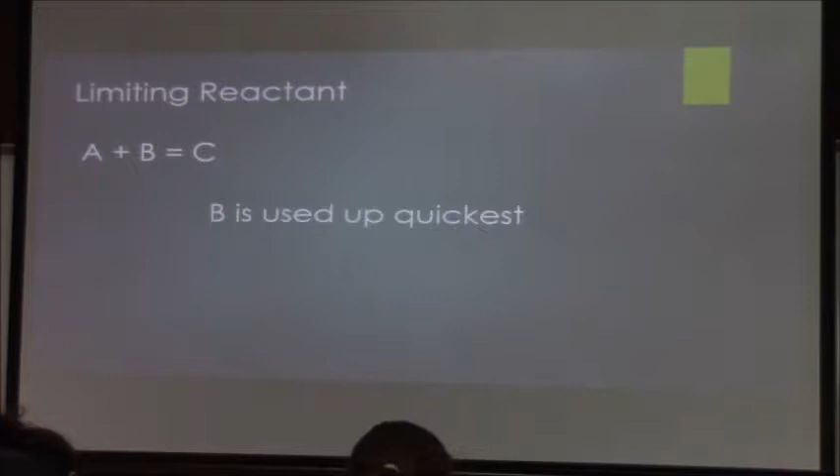So this is Glenn Beckmeyer's quick water chemistry background crash course. Limiting reactant: we have the equation A plus B equals C, and B is used up quickest, so B is the limiting reactant. If we had more B, the reaction could still go on. Simple, right? You guys follow me? I want this to be interactive — I don't want this to just be boring.

I hated those kinds of presentations. So, limiting reactant in an aquatic system — CNP. Can someone tell me what CNP stands for? The C stands for carbon, the N stands for nitrogen, and the P stands for phosphorus. The growth of biomass in an aquatic system is directly proportionate to CNP. So the more CNP introduced, what do you think happens to the biomass? More biomass, there you go.

The higher levels of CNP that are introduced into an aquatic system cause an overabundance of biomass. What do we call that? Eutrophication — there we go, it was.

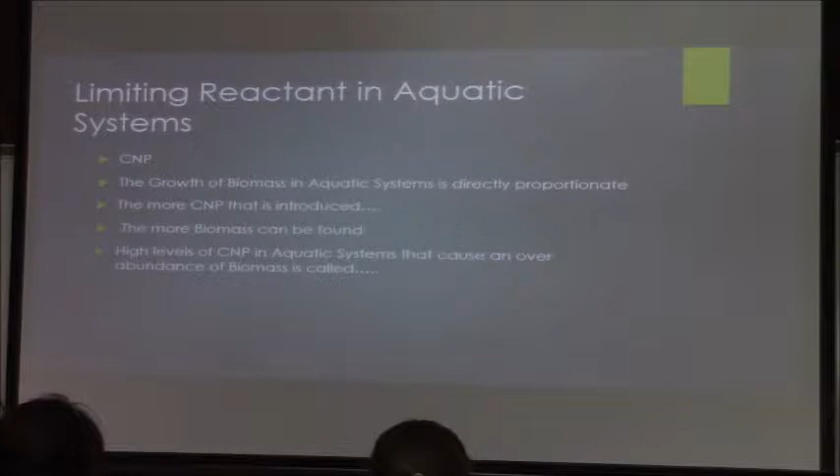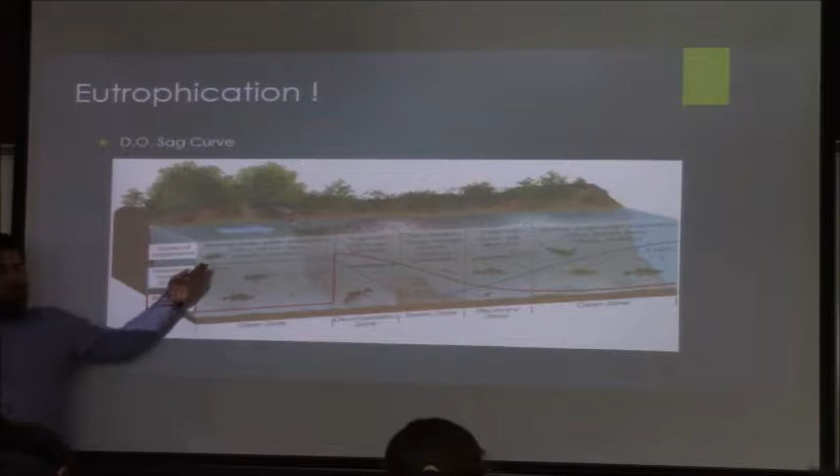So this is a DO sag curve with illustrations of aquatic organisms on the back. I just really like fish. Here you can see in the clean zone, in the healthy stream, you have high dissolved oxygen, so you have many different levels of organisms and low BOD.

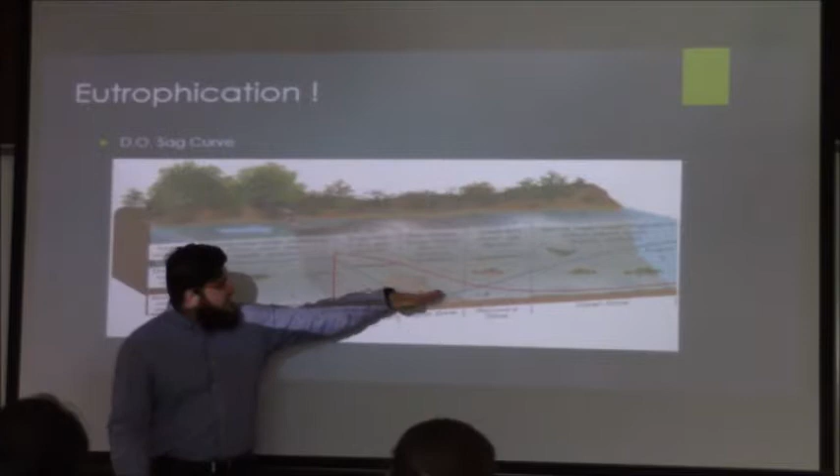When water pollution, like CNP, is introduced, that causes eutrophication, the BOD raises, and because the BOD raises, we have this sag in the oxygen. If you look at the illustrations, when this sag in oxygen occurs, we have these lower levels of organisms that aren't too favorable to humans.

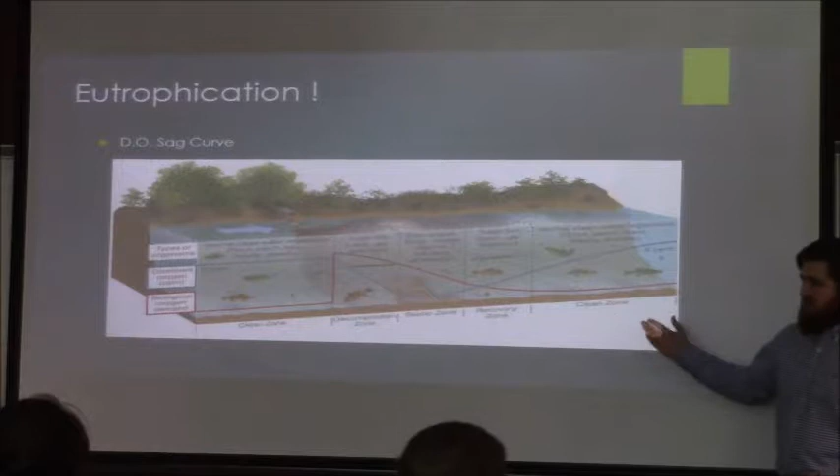I'm a big fisher, I'm a fisherman. I like fishing, I don't like this, I want this, or I want this. That's why personally I like this illustration a lot. Eventually the stream will heal, the BOD will lower, and the dissolved oxygen will raise, and then we have the more favorable kind of fish that you want to go after.

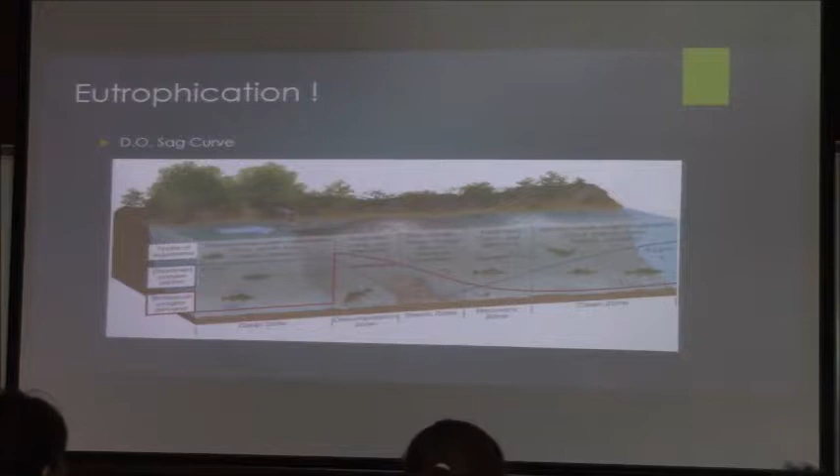Who can tell me what the first form of nitrogen is that is introduced? Okay, we got ammonium. Can someone tell me the next one? Nitrite. Nitrite, all right, what's next? Nitrate. Nitrate. And then ultimately what do we want? N2. N2. What's special about N2? It's a gas, it will bubble out, it will leave the system. We want that to leave.

Originally in wastewater treatment, the ammonium and nitrite at high levels, we wanted to get rid of those because they're toxic. I also have a saltwater fish tank at home. If you have high levels of ammonium and nitrite, you're going to kill all your fish. You want those toxic levels to go down before cycling the tank, before you introduce your fish.

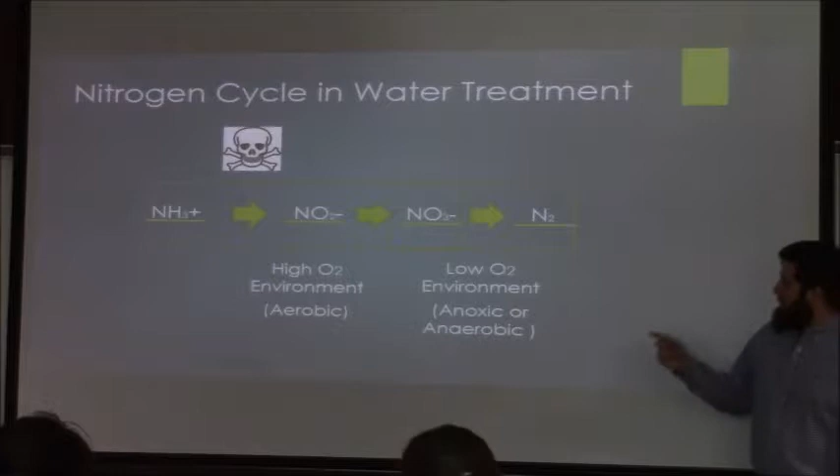I'm going to talk about this a little bit later. I have a friend who is a civil engineer, he went to a good civil engineering program and took a few environmental courses. When I talked to him about it, these arrows, I asked him what those arrows represent, what is actually making those changes. He said oxygen is making those changes, you're adding oxygen and it's changing. Can someone tell me what those arrows are actually representing? Bacteria, yeah. So different types of bacteria are being represented by those arrows. One type of bacteria is making the first change, another type is making the second change.

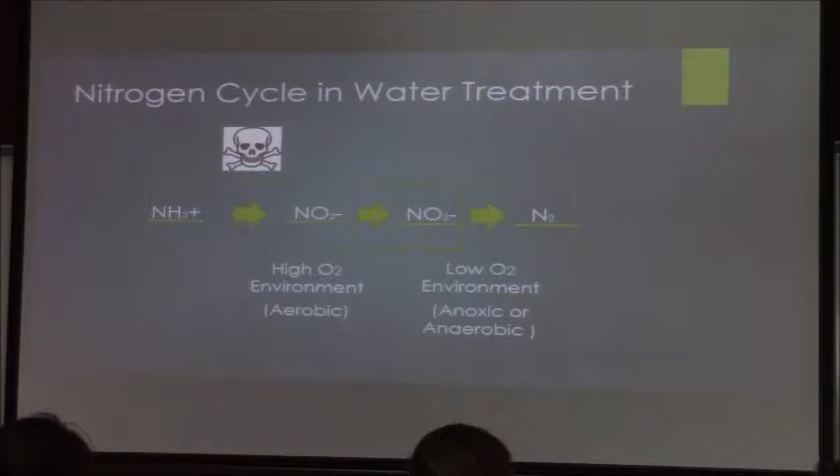So I'm going to talk about my first internship. My first internship was in between my sophomore and junior year, which is a good time, I feel, to get one. Then you have your background information, more or less, you're able to have some intellectual conversations with people you're working with, spit some big words and they're like 'oh, nice.' Then in between my junior year and my first senior year, I split that time between being an engineering intern and a lab technician. As an engineering intern, I did inflow infiltration for the sanitary system going to the plant.

As a lab tech, I did daily water quality tests, testing things like BOD of the aeration tanks.

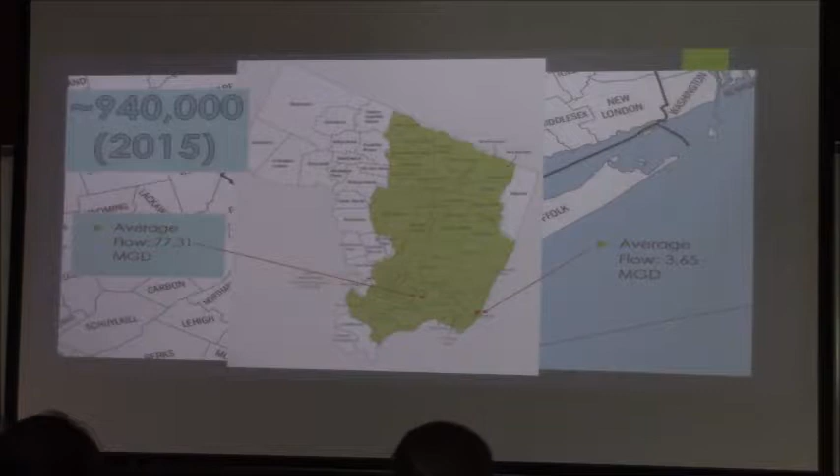The two dots represent the two wastewater treatment plants found within the BCUA. The one on the left has an average flow of 77 million gallons a day, and the one on the right has around 3.65 million gallons a day. I worked at the one with the 77 million gallon, much larger plant.

This is an overview of the plant. Again, it's Bergen County Utilities Authority. It's a conventional wastewater treatment plant using activated sludge. A few unique things make it stand out from other plants.

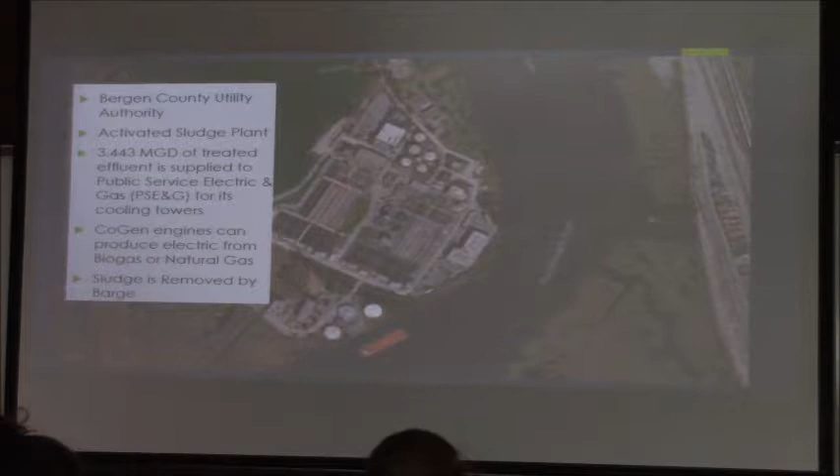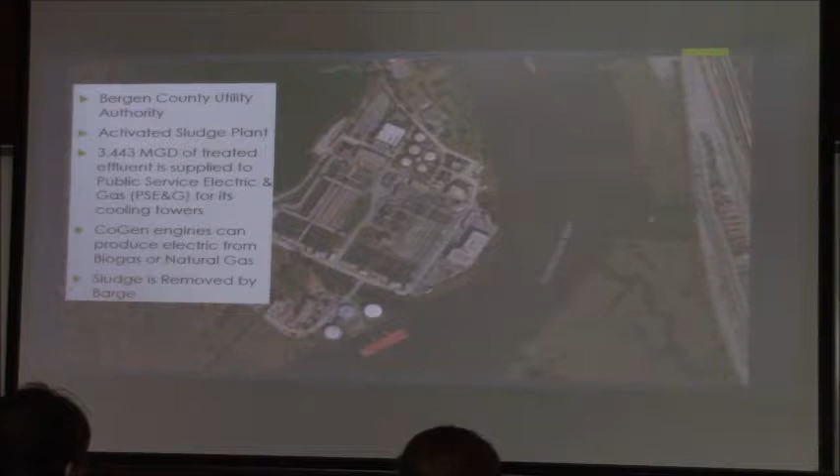Across the river is a PSE&G power plant. Power plants need water for their cool downs, and we would supply them with around 3.5 million gallons a day of clean effluent. So instead of having to pull water from another source, they use our outputs as their inputs, which is good environmental engineering.

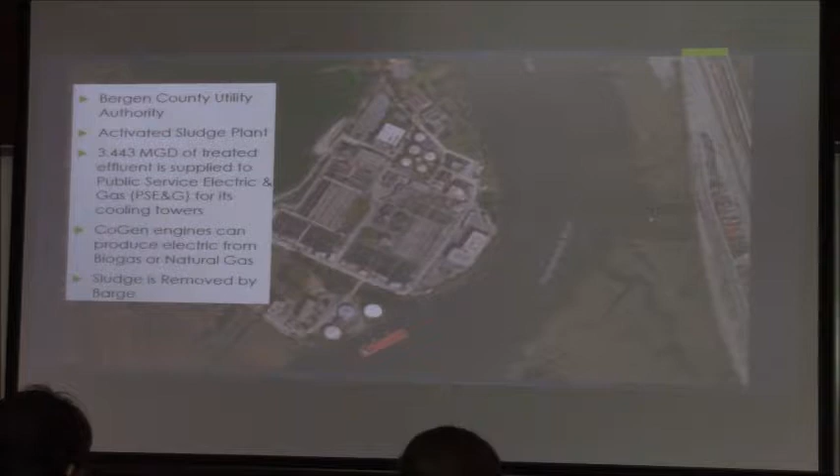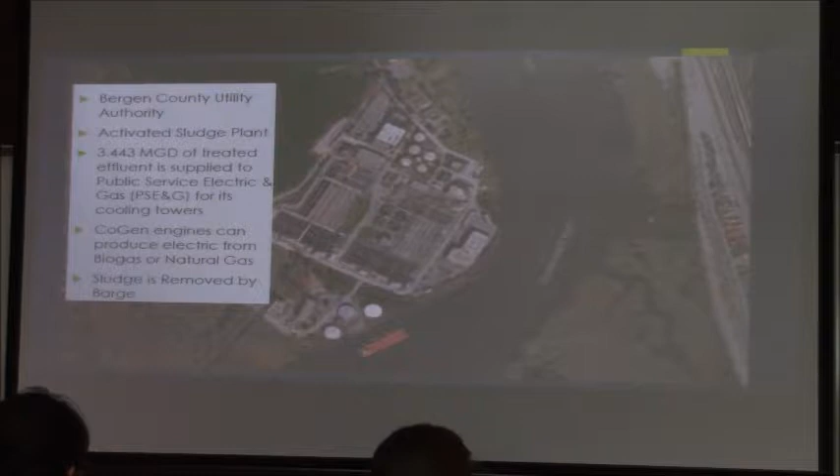We also have two cogen engines. They can either be run on natural gas piped from the power plant we give the water to, or they could run on biogas. It's not totally ready, to my best knowledge, to run on biofuels alone yet, but through our digesters they collect the biofuels and we burn it for energy. Again, we're using waste as an energy source.

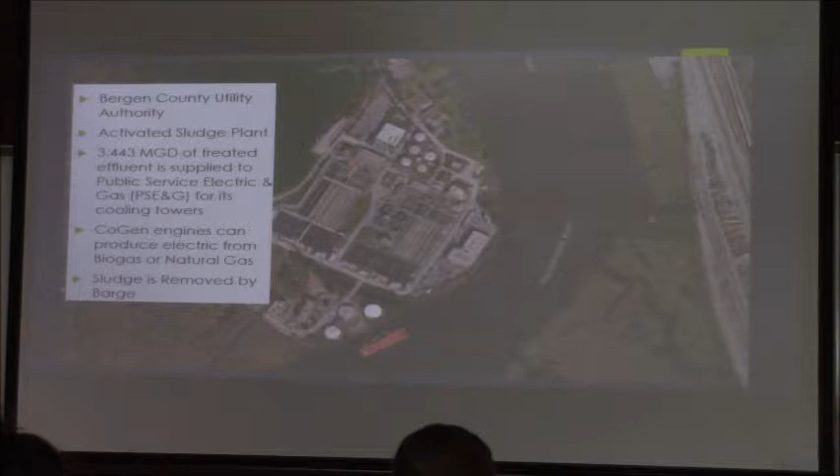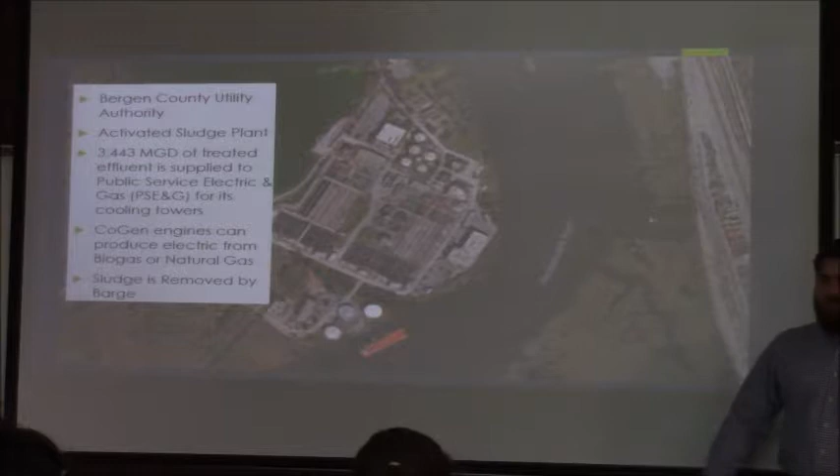Another cool thing: wastewater treatment plants using activated sludge produce sludge. Our plant would dewater it and put it on barges. Instead of using many trucks, we would load up the barge once or twice a week and float it down to the beautiful city of Newark, New Jersey, where they would dispose of it.

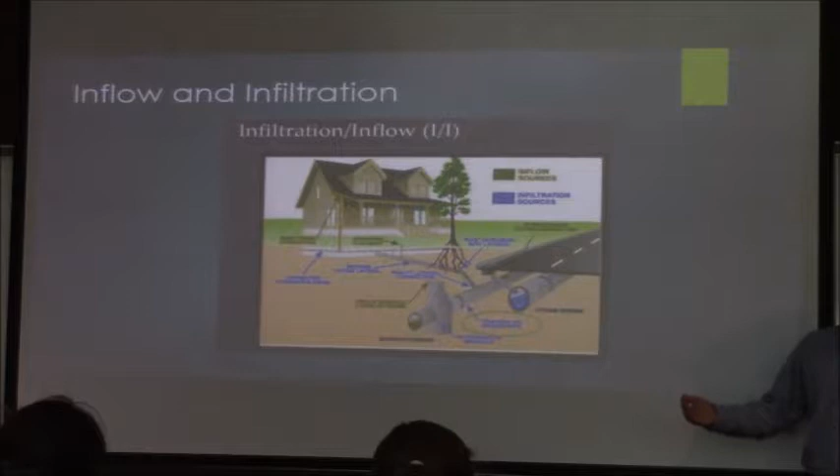As an engineering intern, I mostly focused on inflow and infiltration. There's a slight difference, but they kind of have the same result. The infiltration we mainly focused on was from cracked pipes. If you have a sanitary line with a cracked pipe, water from the outside environment is going to get into it and raise the flows in that pipe.

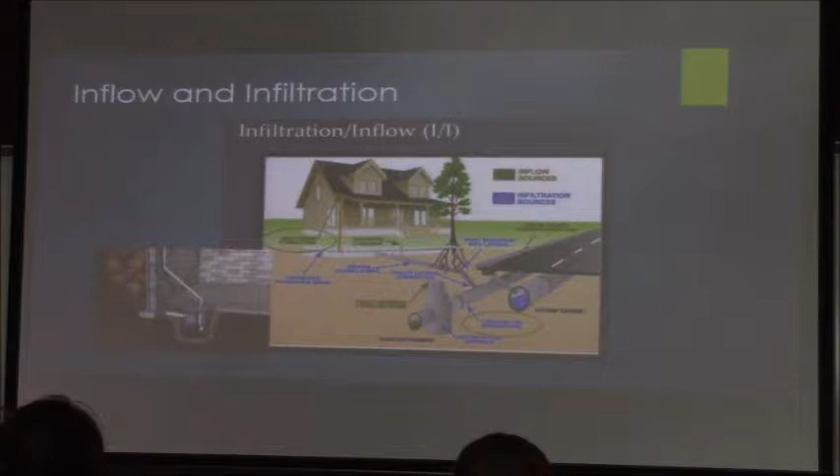The inflow we focused on was from illegal connections, like illegal roof drain connections and illegal sump pump connections. Does everyone know what a sump pump is? Does someone not know? All right, so a sump pump is something you put in your basement—if it floods, it's just a pump to get the water out.

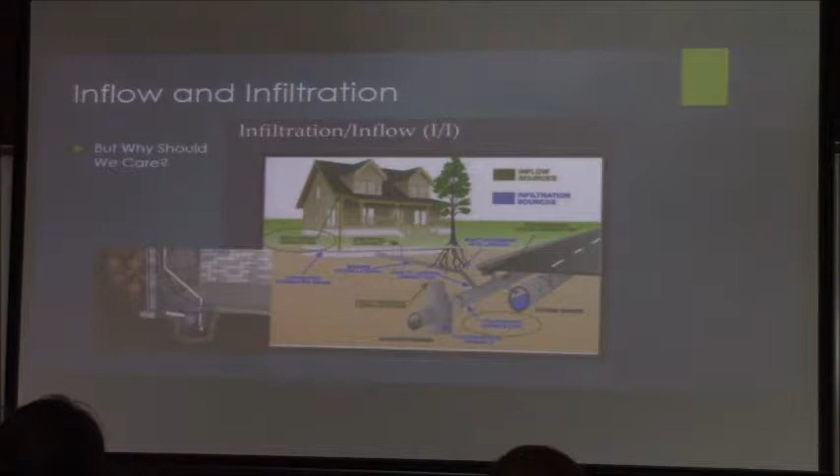But why should we care about any of this? Well, we're found in the Meadowlands. Has everyone heard of the Meadowlands before? If you're a football fan, that's where Meadowlands Stadium is, where the Giants and the Jets play. But the Meadowlands is also a very important estuary for the area, with a lot of ecological value.

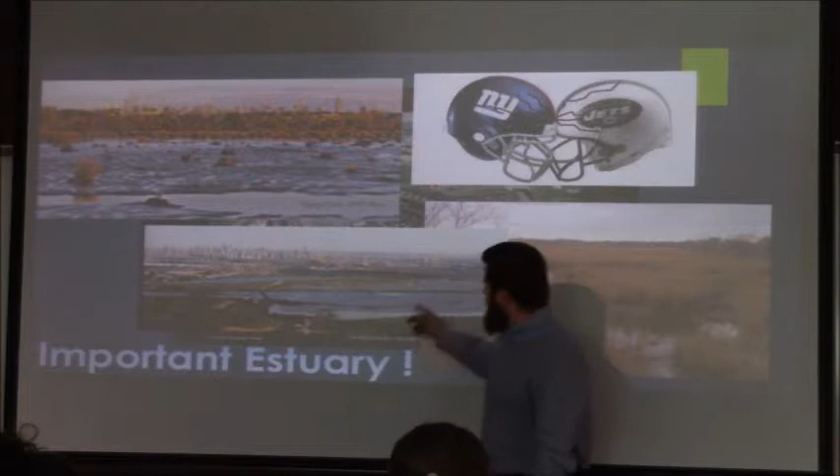This is a great shot—I'm thinking about printing it out and hanging it up in my office. This is the Meadowlands, and here's the New York City skyline in the background.

So, infiltration and inflow in the Meadowlands: the Meadowlands is tidally influenced. We're close enough to the Atlantic Ocean, going up to Newark Bay and New York Harbor, that we're tidally influenced, leading to a higher influent flow, either from storm or tidal events.

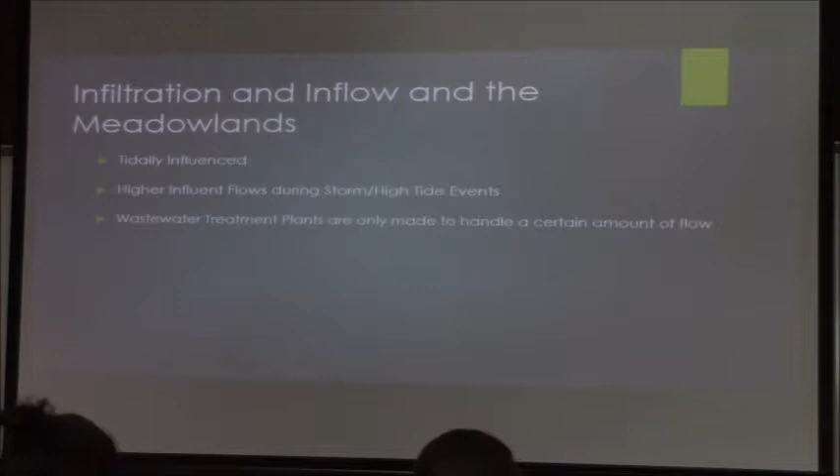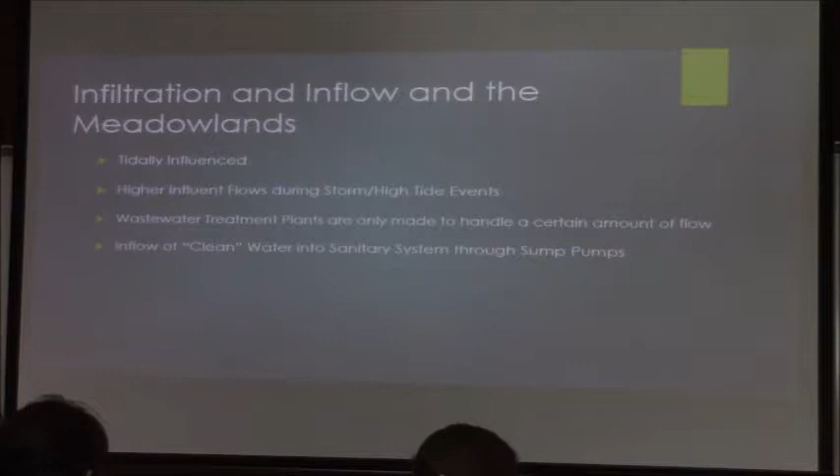Wastewater treatment plants are only made to handle a certain amount of flow. So if we have inflow of clean, non-sanitary waters into the system through illegal sump pump connections, and infiltration of clean water into the sanitary system through cracked pipes, that's going to raise that flow. Flows higher than what the plant was designed for will ultimately lead to waste going straight into the environment.

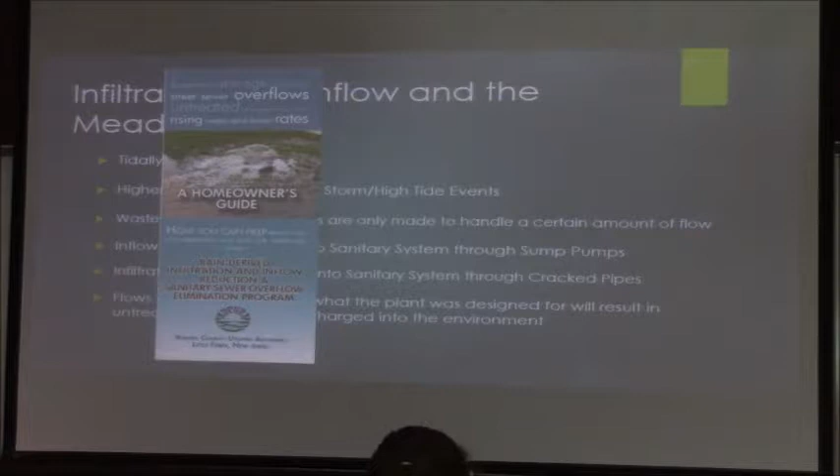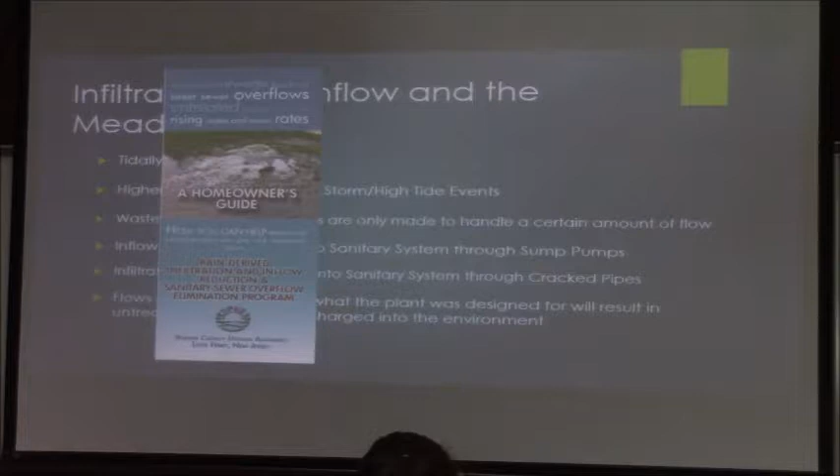So what we did, and I wasn't a part of this decision making, I was low on the totem pole, we had a community outreach program where we would go to different houses, or different towns, and give them information about what's going on.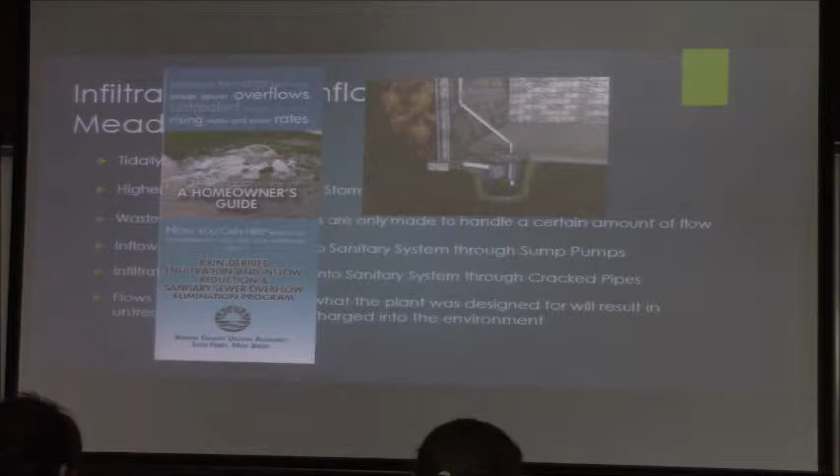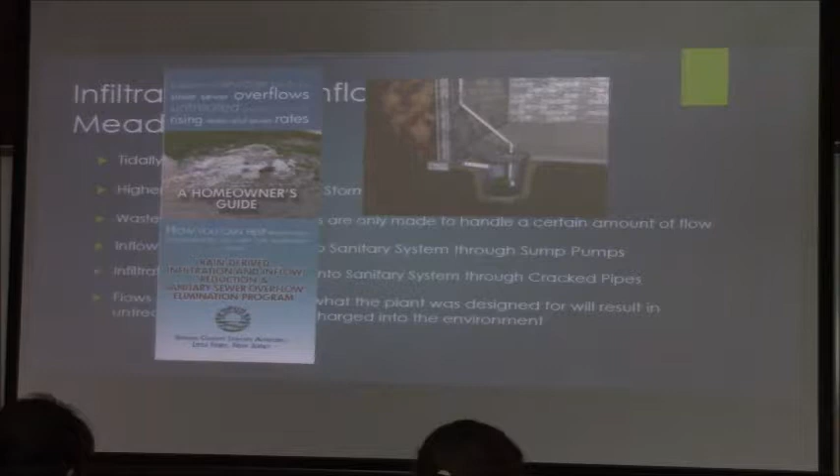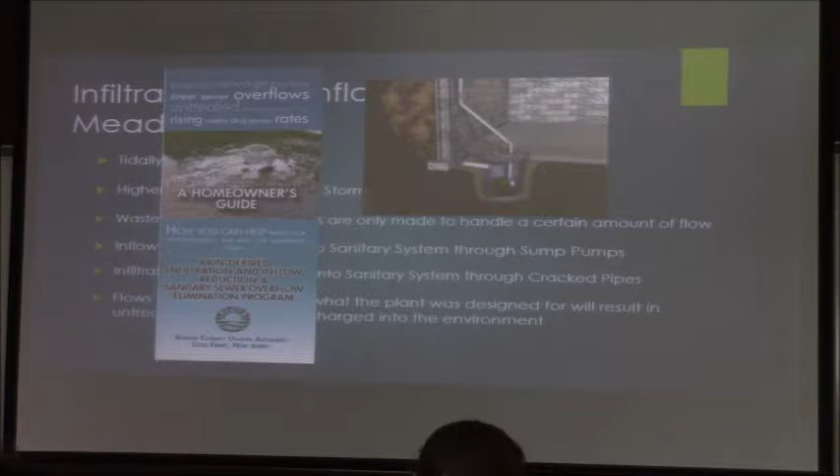The average person flushes the toilet and that's it. Most people don't know what's going on behind the scenes. In Bergen County, they made a law that if you're going to sell your house, the BCUA has to check if you have sump pumps or illegal connections. It's not so much the homeowners doing it, it's more that the contractors want a quick and easy fix, cheaper, more money, in and out. So you might have an illegal connection and not even know about the impact you're causing.

This is a roof drain going into a pipe. Who could tell me where that pipe is going, just from looking at it? Because I can't. Is that illegally connected to the sanitary line? Is it going to the street? Is it leaching out underground? I can't tell. So what we would do is put dye into pipes like that, run a hose to wash out the dye, then go open the sanitary manhole in the middle of the street. If the dye came into the sanitary manhole, then you know you have an illegal sanitary connection.

So I did that for the whole first summer, and then half of the summer after that, along with lab technician work at the BCUA.

So in between my first senior year and my second senior year, I worked with Beckmeyer Engineering. If that name sounds familiar, I know a guy there.

It's in East Rutherford, New Jersey, again where Giants Stadium is, I'll give you a pinpoint of where that's at. I was an engineering intern. Beckmeyer Engineering is municipal engineers, but we also work with wastewater treatment, stormwater, and contaminated soils. This was one site we worked with, BJ's Wholesale.

They called up the town and said, we've had a problem with flooding for a while, we tried to do something in the past, it's not working, can you guys come back out and see what you're doing? It's hurting our business, and lower business means lower taxes, and the town likes taxes. So the more business they get, the happier the town is.

There's a drainage ditch that runs along the side of the BJ's, and up here is the parking lot. This is actually a PSE&G solar panel site. So there's the drainage ditch.

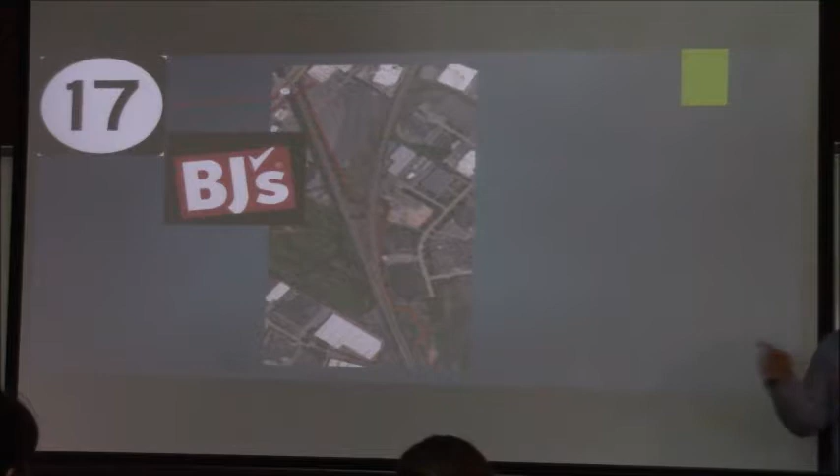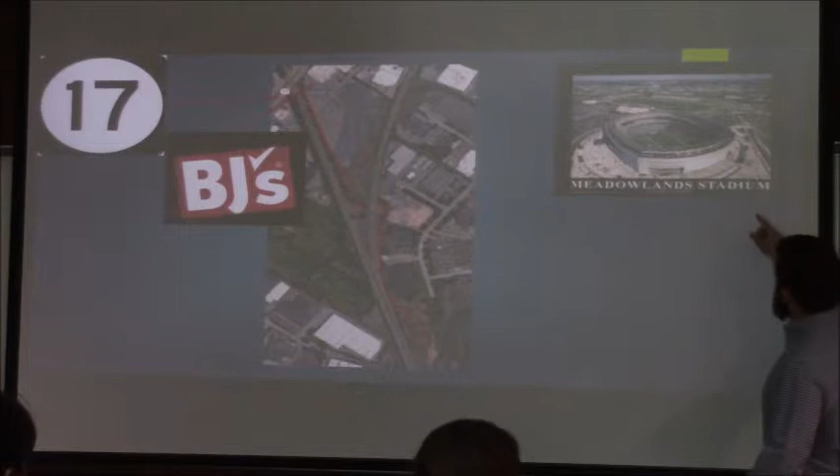That's Route 17, a major commuting highway. It runs north-south, connecting New York State down to Bergen County, with connecting highways across to Manhattan and the rest of New York City. If you're coming through Bergen County trying to get to New York City, you're probably taking Route 17 at some point. The Meadowlands Stadium, if the map continued, would be somewhere in that area. We have an Amtrak train rail that runs right over the drainage ditch.

This is Berry's Creek, which it ultimately flows into. Berry's Creek runs into the Hackensack River. Here's a sign you can find all along Berry's Creek telling you not to eat the crabs and striped bass you could catch in this river.

The entire Berry's Creek is a Superfund site. Do we know what a Superfund site is? Do we not know? All right, in layman's terms, a Superfund site means a site is so contaminated that the state has to come in and take it over and create a plan to clean it, because the individual or group that caused it either isn't around anymore or it's just too much money.

It's not realistic that they're going to ever be able to do anything with it. So the entire creek bed is a Superfund site. New Jersey has the most Superfund sites, if not...

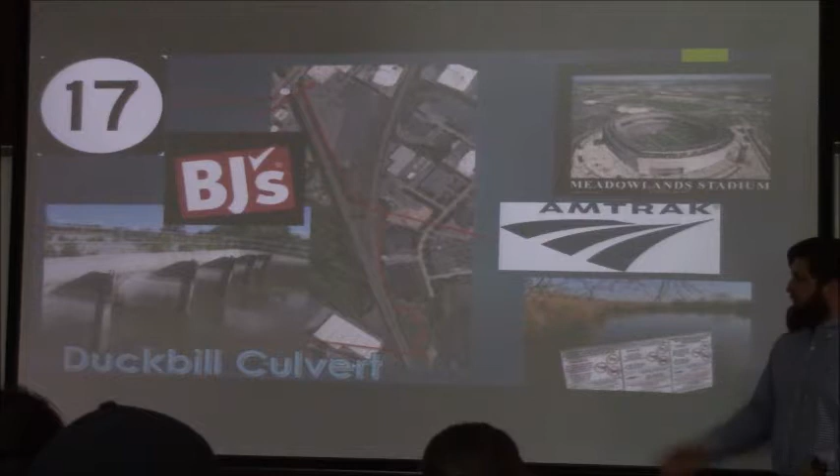And then all the way at the end, we have a duckbill culvert. The first time they went in, they put one of these culverts in. They said, we're going to prevent the river from tidally influencing the drainage creek, and end of story. But real quick, this is a tidally influenced site.

That's where the water line is. We're going to hit that again, but just to start you thinking—why might that be a problem?

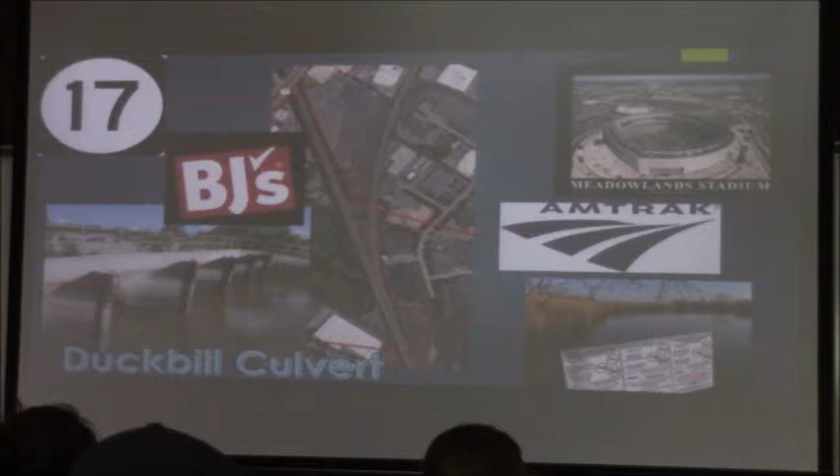So I went out and did a prelim site analysis of what I found. At the beginning of Route 17, we have standing water. It didn't rain for 3 days—this is a drainage ditch, there shouldn't be standing water.

We have more standing water in the middle. Move down, more sedimentation. So what is our main concern that we saw? Like what seems to be the problem? I said the word, it starts with an S. Someone just say it—sedimentation. There we go.

But why is this not just an easy fix? Why can't we just go in and take it all out? I said it before—Berry's Creek. What's in the sediment?

I hear kind of it—say it loud, what's up? Mercury. Yeah, it has a lot of contaminants.

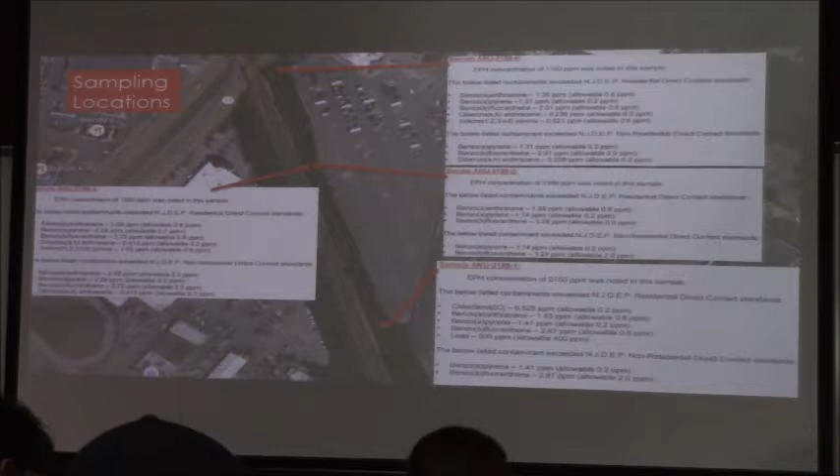And we got some soil samples done, up and down, to see what these contaminants were. I looked it up, and a lot of these had to do with a pesticide company, industry that was there and just dumping all these contaminants straight into the river.

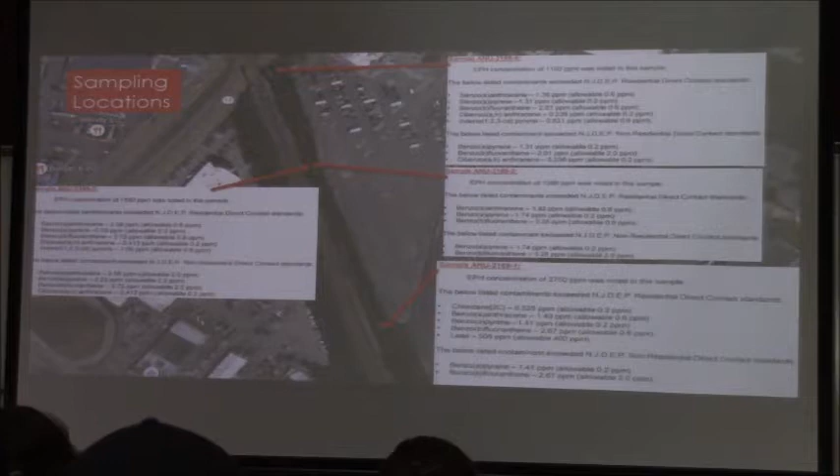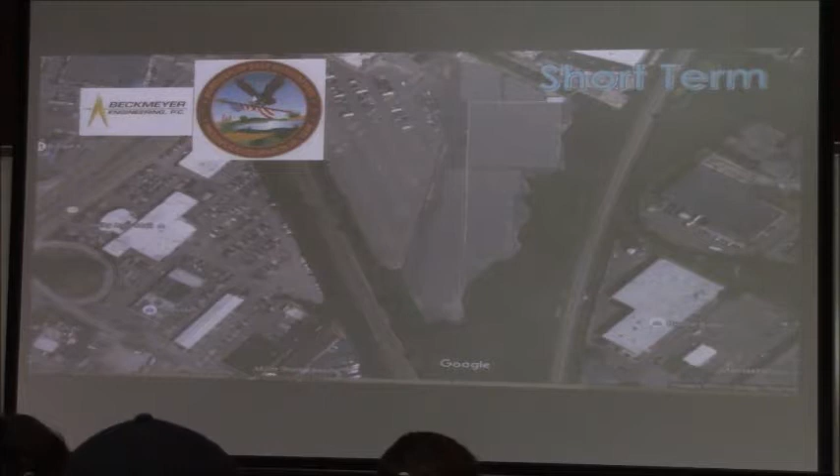So short-term solution: the borough of East Rutherford, with Beckmeyer Engineering under that, is teaming up with BJ's Wholesale. The New Jersey Department of Transportation is joining this because during rain events, when the drainage ditch floods, Route 17 floods—it's a major commuting highway.

Amtrak, because of the railroad that runs over it. Bergen County, with mosquito control specifically, because we convinced them that the standing water is prime habitat for mosquitoes. The Meadowlands facility, the Meadowlands Commission, and within the Meadowlands Commission is New Jersey Sports.

We're all teaming up, so we're kind of like the Avengers. But instead of fighting crime, we're just all throwing money. Each one of us are going to throw in—we agreed that we're going to financially take this burden all together. I like Lord of the Rings better, so we're kind of like the fellowship of throwing money.

That project is continuing, so I hope sometime I'll get back and I can tell you how this ended up.

So long term, we have the duckbill. During a rain event, the pressure on the drainage side is higher than the other side, so the duckbill will open and allow it to drain out.

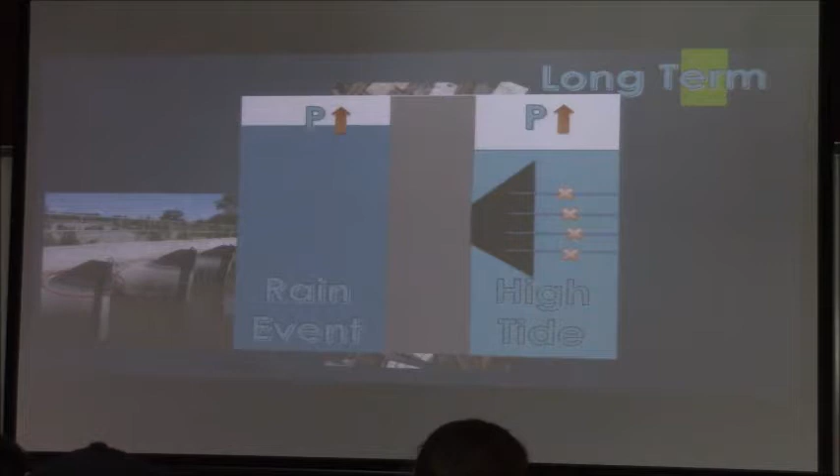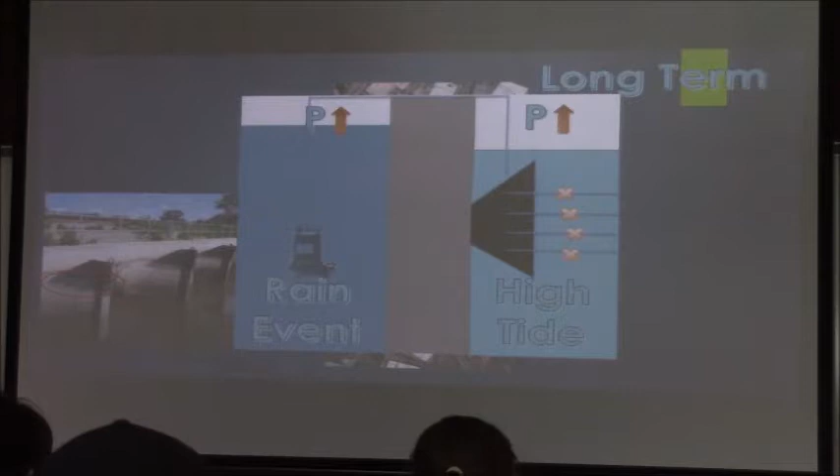But because of a high tide event, if you have it building up in the back, the pressure is not as great as the pressure in the front, and the drainage side kind of just forms a bowl and will flood. So we were proposing to put a pump there, so if there is a high tide event with a rain event, it will drain out.

My first job out of college was with Brown and Caldwell, a purely environmental company. The office was in Virginia Beach, and my position was an entry-level environmental engineer in the water resource division.

I mostly worked with stormwater runoff, but the other side of the office was sanitation. I showed interest that I liked the sanitation wastewater side, so they threw me some of that work when it was available.

East Coast here, that is where Virginia Beach is. It's at the mouth of the Chesapeake Bay. This is called the Tidewater community, and this is where we did most of our work.

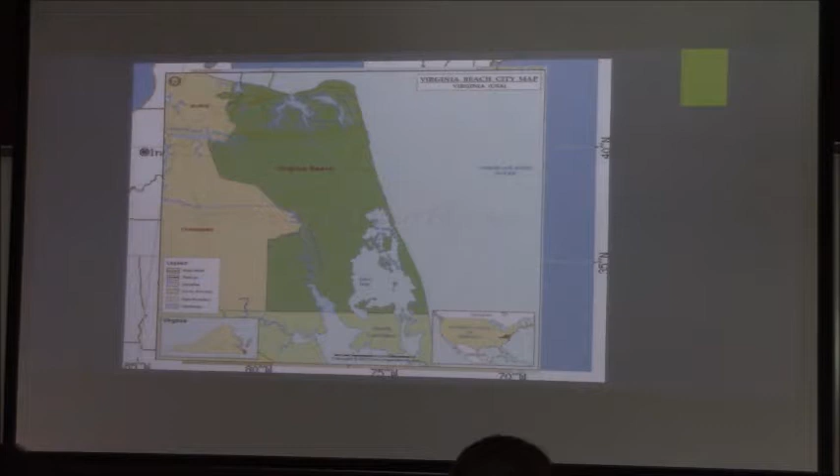Just to give you guys an idea of how big Virginia Beach is, because I had no idea until they told me to drive to the other side of it. It's pretty big, pretty huge. It's over an hour drive to get from one side to the other. So if they say you have to go see a site, get ready for a nice drive while still being inside the same town the entire time. So there I did stormwater runoff treatment.

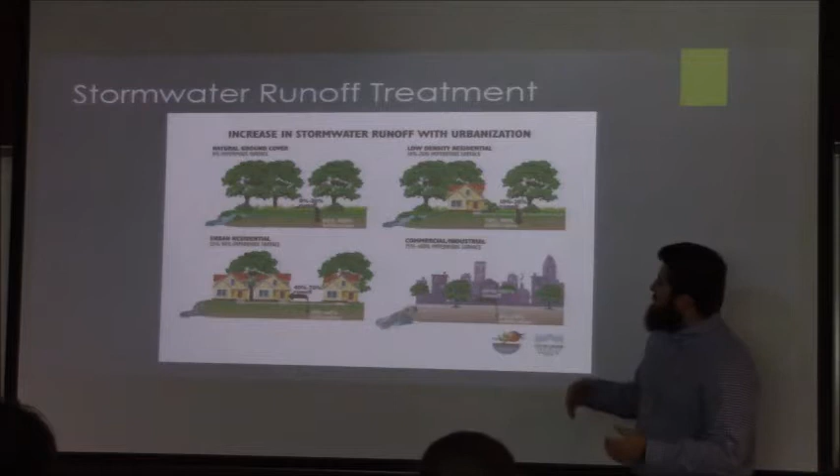So say we had no human activity whatsoever, right? We would have the top left picture where we have a forest, and most of the runoff is getting put back into the ground. When we start moving down, we build a house, put in a driveway, a sidewalk, whatever, the runoff raises because we have impervious pavement, impervious surface. That water can't infiltrate back down into the ground.

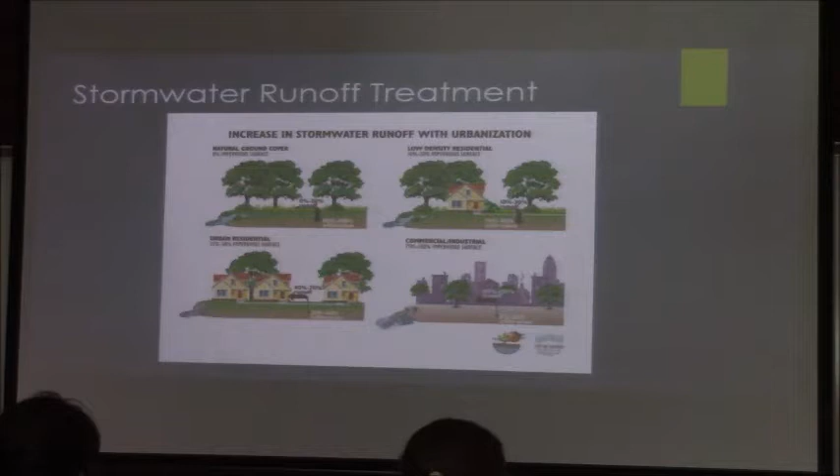You put more houses on, more runoff. You have a city with minimal pervious cover, all that water is going to run off. And what's in that water that we care about? That CNP that we talked about before. So here we have a basic stormwater system that you would find in an average urban area.

You have a house there, we have an illegal connection. Oh no, that's not illegal, that goes into the street. No, we're good there, it just goes underground. We have a stormwater inlet, right? So in this system that we have right here, the CNP is picked up, carried through the system, and spit out into the lake, which causes eutrophication, right?

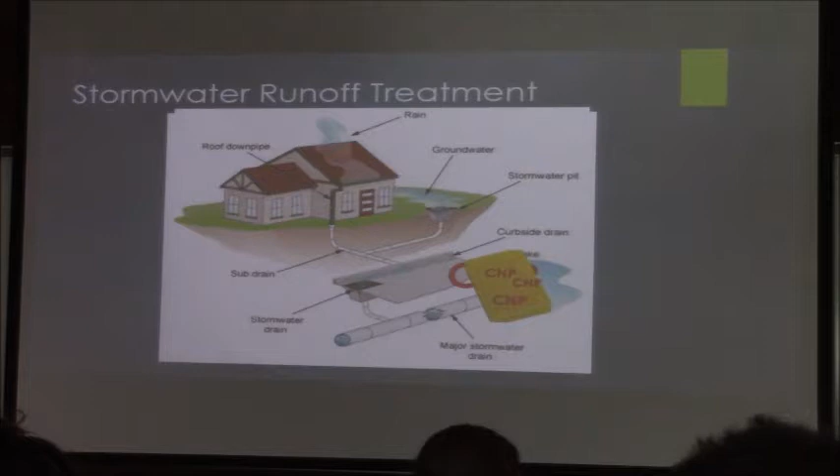So we needed to put something in between the system and the environment that would remove the CNP. So we put a sponge, we're going to have the CNP go down and get caught in the sponge. That sponge is called a stormwater management facility, or SWMF.

S-W-M-F, SWMF. There's two types that we would design: non-proprietary and proprietary. So the non-proprietary, if you guys take the ecological engineering classes, you'll learn about constructed wetlands, which was a big one that we did. We constructed wet ponds and we would do bioretention basins.

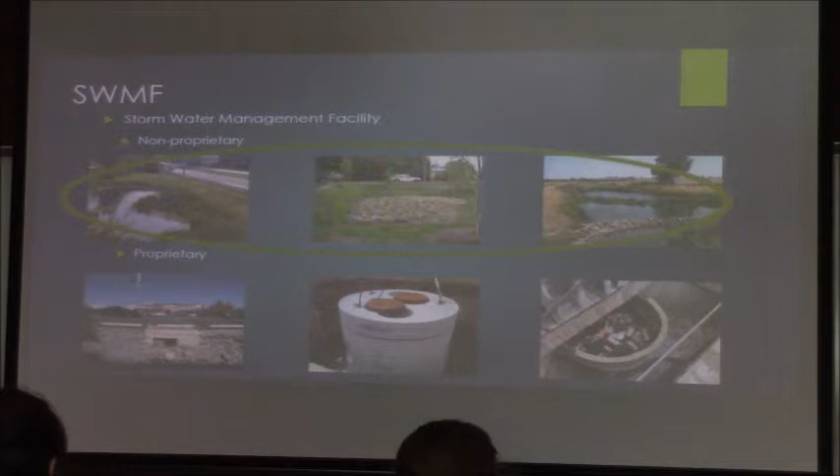So creating a SWMF, we use a combination of AutoCAD and GIS. First you had your site where you wanted to build it, and you had to delineate the drainage area.

Can someone tell me what delineating a drainage area means? So if we have one point on a map where we delineate the drainage area, we're figuring out all the area around there where that water will flow from. So if you think of the East Coast, we have the Appalachian Mountains. If water falls on one side, it's going to the Atlantic. If water falls on the other side, it's going to the Mississippi. We do that, but on a very, very small scale.

Then we look at ground cover. Again, if it's a forest with a bunch of trees, we're not as worried as if it's, for example, from the last project I did, a BJ's wholesale parking lot. You're going to have more runoff coming off the parking lot than if it's going through a forest. Then soil types—so why would we care about the soil types?

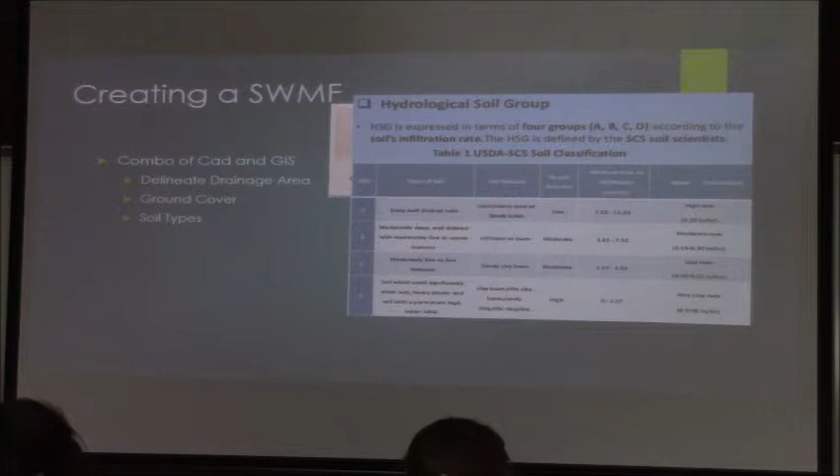If we have a bunch of sand, that's going to react differently than a bunch of clay. So soil type A means you're going to have the most drainage and lower nutrients running off of it. If we have soil type D, which is like your silts and clays, the water isn't going to be able to infiltrate as well, and it's going to have higher rates of runoff.

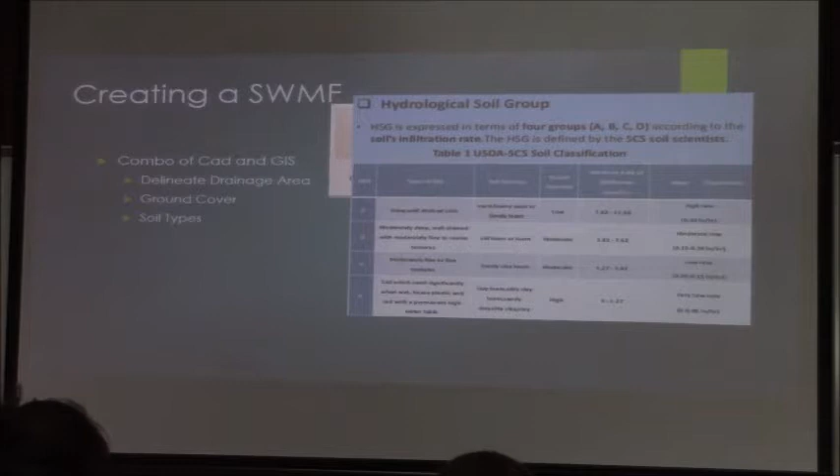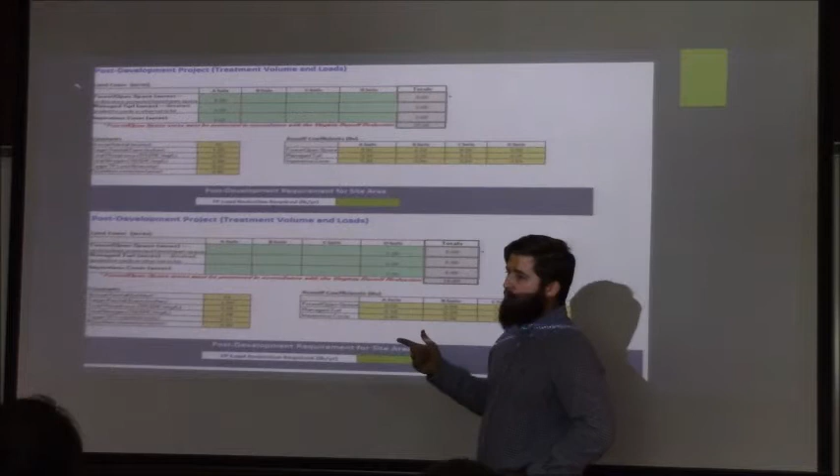So here's my short little quiz. We have hypothetical 2 plots of land. The first plot, equally distributed 5 acres into each land cover type: 5 into forested, 5 into urban, 5 into impervious, but it's all soil A. We have the same exact thing, but in soil D. On the bottom here, I have my boxes covered up. Which is going to have the highest phosphorus runoff? A spot that is mostly soil A or soil D?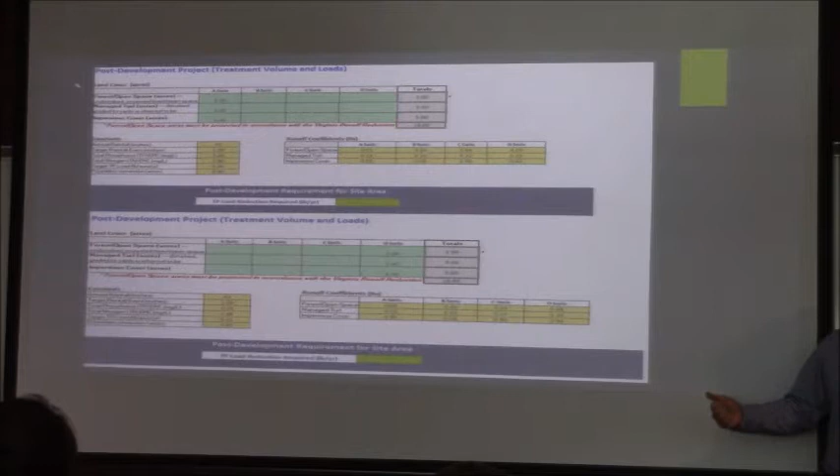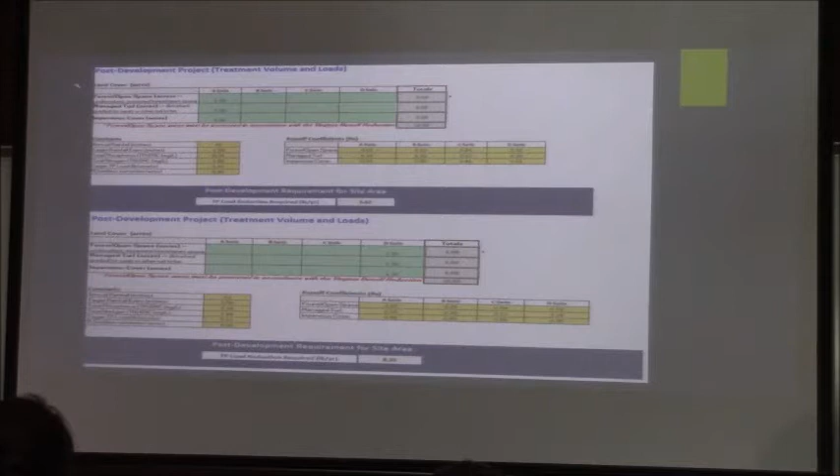I ain't going until someone says it. He gives me an answer. D. Say that again? D. D, yeah. So it's the same exact thing, just the only thing different is the soils. Here we have 6.6, and here we have 8.

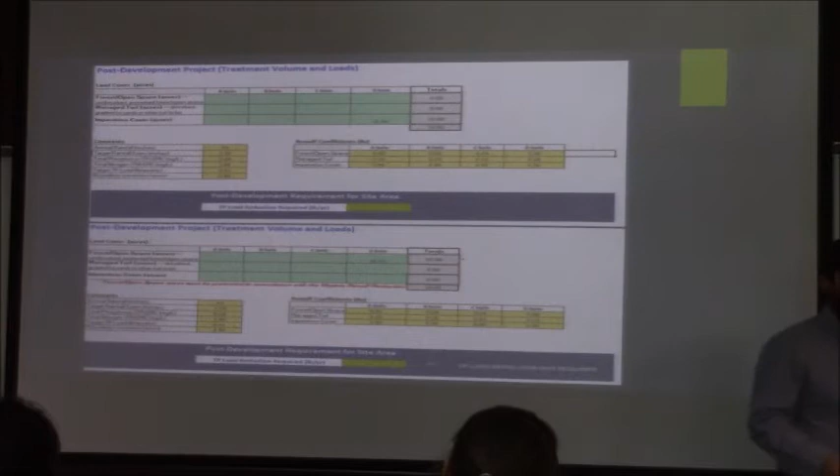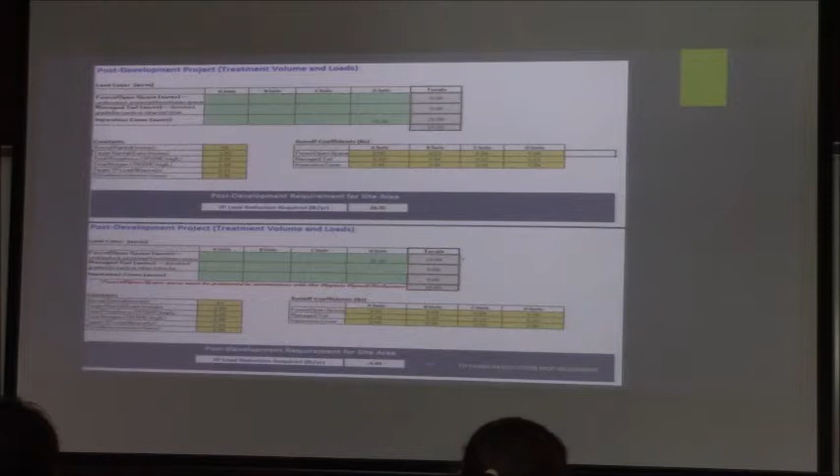Here's number 2. So now we have 15 acres in soil D of forested, or 15 acres of soil D over impervious cover on that soil. What are we going to have the higher runoff values for, impervious or the forested? Impervious. There we go, I actually got kind of excited. I just noticed this when I was going through the presentation one of the times. We actually got a negative value of nutrient runoff when we did it purely on forested, so it kind of gives you insight on how they do the calculation. Forested will take off, very excited.

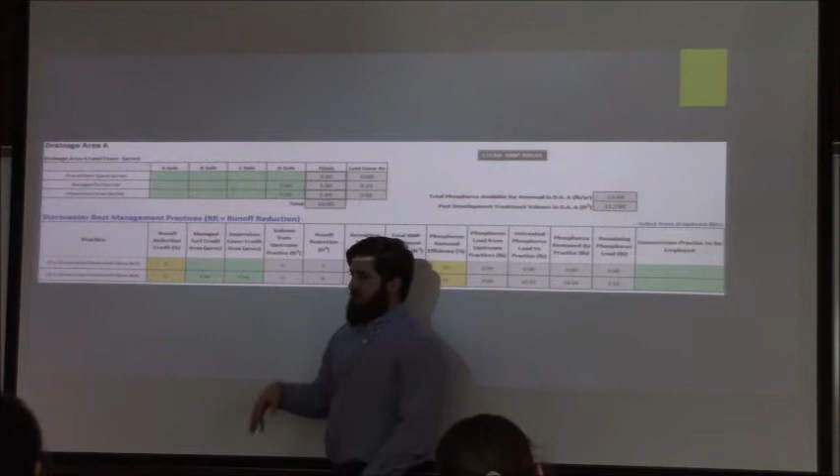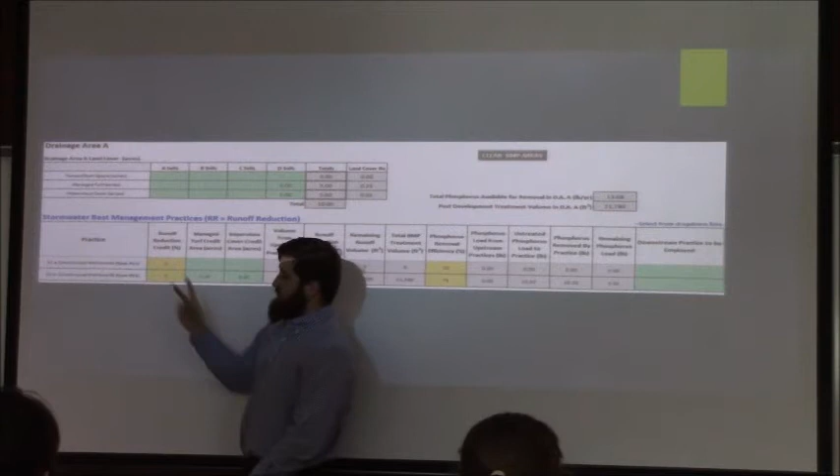All right, so here's another hypothetical. 5 acres of soil D on managed turf, that's like front lawns, fields, like baseball fields, not football fields, grass football fields. And then we have D on impervious, so like a parking lot. So you put it in up here, and whatever value goes to the exact spot, because you can mix up, like this spot is only going to receive this much, you can link them up. In this example, we have the full amount going to a level 2 constructed wetland, and then we get an output. What I really cared about during the initial part was the total volume I had to size the SWM for.

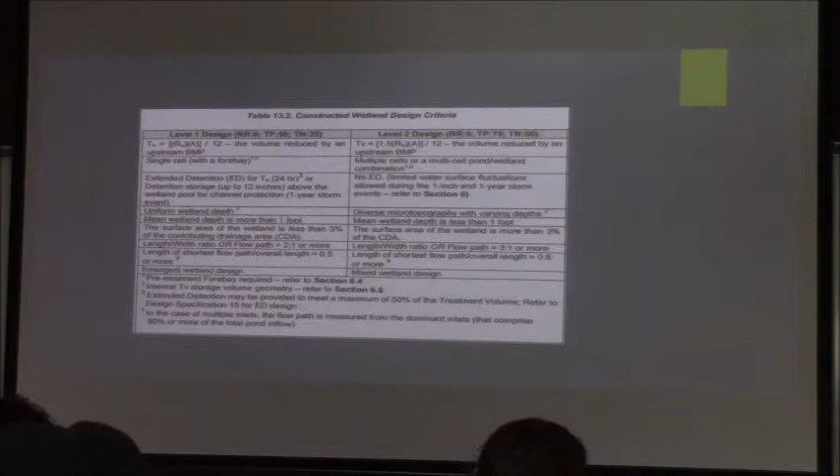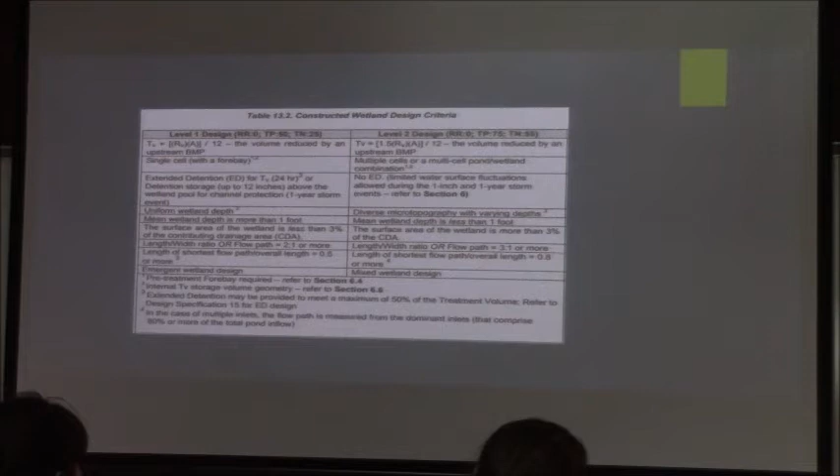This is just an example of the difference between level 1 and level 2. If you put a level 1 in, you're not going to have as much nutrient removal as you would with a level 2. Level 2 is for a wetland, it has to have bends and turns and a lot of different things to try to remove more nutrients.

So that was the end of my involvement with that project. What we did was we imported layers from GIS to AutoCAD. We used those layers to size the SWM, putting in different volumes. We got a volume for, let's just say it was a wet pond. We then took those different parts and pieces and converted it back to GIS. We created about 22 different SWMs on 22 different sites.

Each had that spreadsheet that we just went over. It had a GIS site map, a write-up about what we were proposing, how much it would remove, any information we thought was important. This thing was a 3-inch binder, and there was just a monstrosity of maps. It was huge.

And then I left BC, I left Brown and Caldwell. I went back home, I was living down in Virginia Beach, for personal reasons I wanted to go back home. And then I again worked with Beckmeyer Engineering. This time my position was a staff engineer, doing all the same things as we did before.

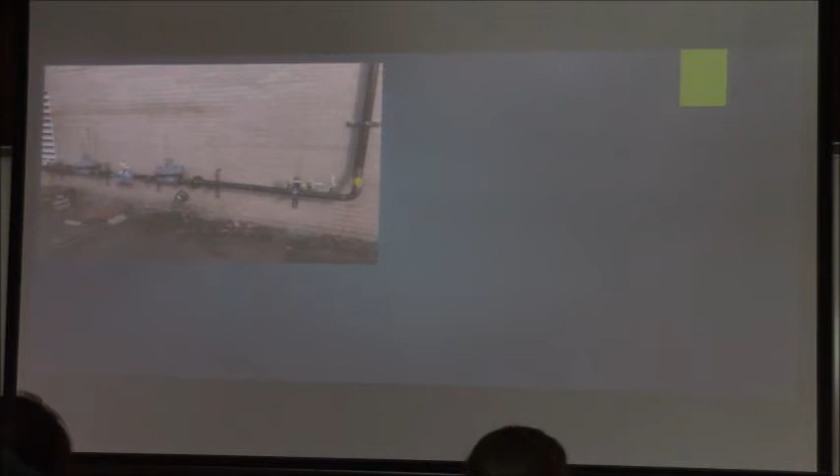This was one project that I worked on that I thought was pretty cool. The wastewater treatment plant there ran on a diesel backup engine. During Hurricane Sandy, we ran out of diesel fuel and had to go to the DPW and start stealing diesel fuel from the trucks, which we got in trouble for a little bit. So to try to prevent that, we converted the engine to run on diesel fuel and natural gas.

Natural gas coming in from the line and from the utility pipe on the street is about 30 psi pressure-wise, and we had to bump it down to 3. We had to do that before we were able to use it. Again, there's some of that pipe.

I've been doing a lot of inspection work, so we have different road projects going on. This is an ADA pad for handicapped residents to be able to use the same walkway that me and you do. There's one over by Eastgate. You guys ever catch that? You guys know what that was for? I used to see them all the time. I have no idea why.

The little bumps on there are for blind people with sticks, so they can feel it out and know right before they're crossing the street. People who have to use wheelchairs don't like it so much.

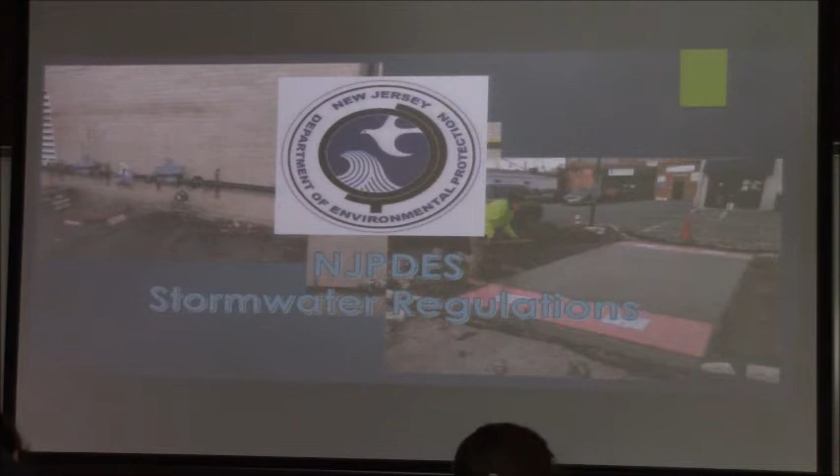The New Jersey DEP is setting some new regulations, more specifically the NJPDES, setting more stormwater regulations. My personal opinion is Virginia had tighter stormwater regulations, and these new ones coming out in New Jersey are more or less looking like the ones that were found down in Virginia.

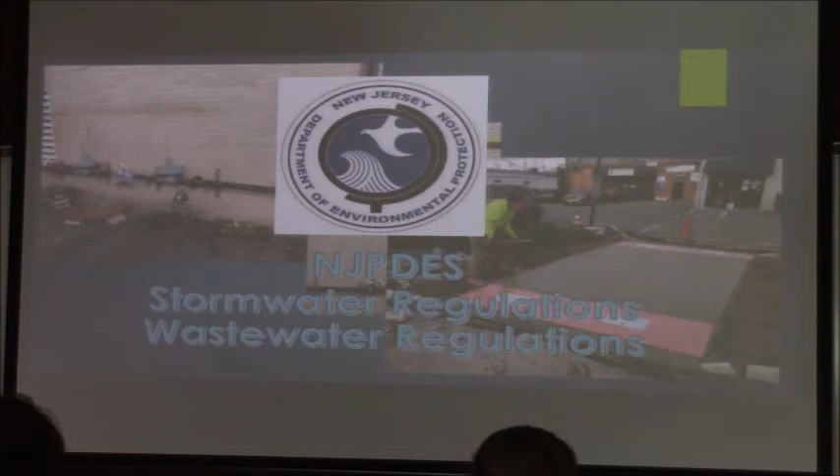We're also getting tighter wastewater regulations. The wastewater treatment plant that I mentioned with the gas, top left corner, they're getting tighter limits. So we have to figure out ways to get those limits down. Those are all projects currently working.

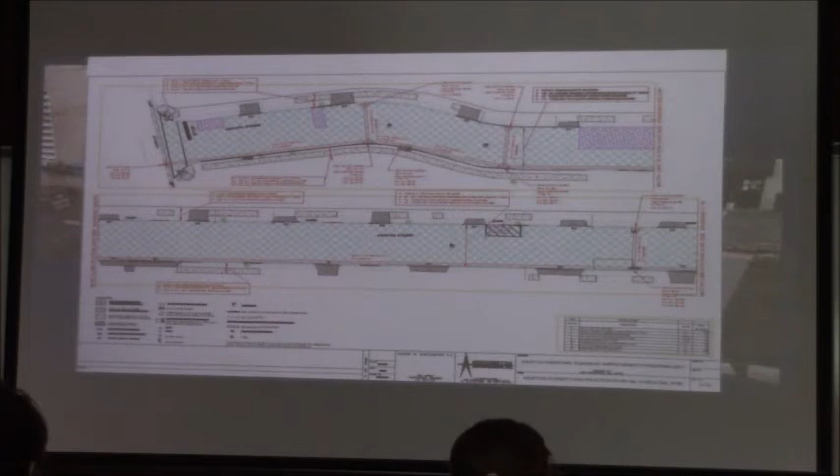So the future, who knows what the future will hold. But my ultimate goal is to become a professional engineer in the state of New Jersey. The first thing I have to do is take my FE test and become an EIT.

I put that off for so long. Do not put that off. I thought, all right, I have too many concussions, I can't take this test now. And then it was like, oh, hold up, this is my last semester in college, I don't want to worry about a big test and have fun. Do not put it off, I'm telling you, because it is so much harder, especially if you're like me, where you didn't have the best grasp of it the first time around. Trying to understand it on your own without the help you have here is 10 times harder. Just do it now. Don't put it off.

So I'm trying to expand Beckmeyer Engineering. In New Jersey, we have different licenses for drinking water, sanitary, stormwater, and wastewater. To get those licenses, you have to do a certain amount of time within the field doing that thing, and then you can sit for a test. Once you have those licenses, you can go and work for towns. There are towns that say we need a person with this type of license for stormwater, we need someone with this type of license for drinking water, in case one of those systems goes wrong, so you have someone on staff that can show up and fix it, knows the town, knows the area.

The easiest way for us, I think, to break more into environmental work is for us to get these licenses, and then we could go into the different towns and just say, hey, we're not even here trying to be your municipal engineer, we're just trying to be here to have your New Jersey C2 license.